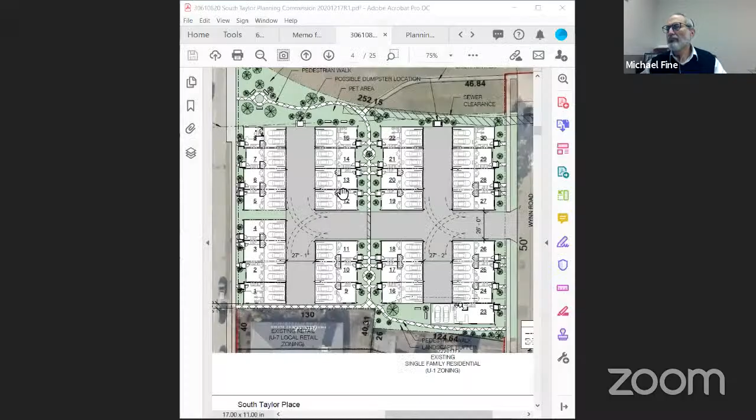And let us know if you want us to ask questions as you go along, or if we should hold those to the end. I'm comfortable with whatever works for the group — if you want to just jump in and ask as we go, that might be easiest. I just want to make sure with the mayor what he would want to do. Well, Hanna, if you're presenting, I'd leave the preference to you if you're happy to address questions as they come up, and feel free to point out if it's something you'll be getting to. Okay, that sounds good.

All right, so our project, we're calling it South Taylor Place.

It's a 1.2 acre site. You can see the site location here—it's a little zoomed out, but it sits between Taylor Road and Wynn Road, in the northwest corner of the city, just on the Cleveland Heights border.

These are some site context photos. You can see photos from South Taylor, Wynn, and Washington. Our site is bordering the education center to the north, residential area to the south and southeast, and then the commercial district on Taylor to the south and west sides of the property.

And remind me, does the laundromat go down or does that stay? That stays—that's off of our parcel.

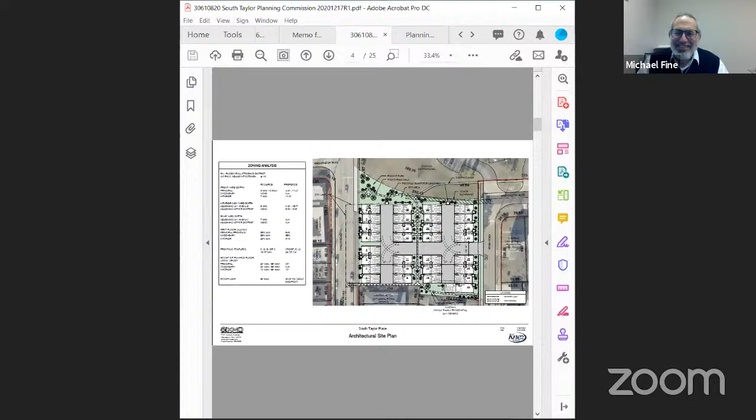Is this the Kenny Kings, or the Kentucky Fried Chicken site? No, we're north of that—there's just no buildings on the site. Got it, sorry, I'm one street over. I've done this my entire life with Cedar and Taylor. Yeah, just south of the Delisle Center. Shame on me. That's all right.

So this is our proposed site plan. We're proposing a 30-unit townhouse development. We think townhouses are a great fit for this site because it sits in between the residential neighborhood and the commercial district on Taylor, serving as a bridge with a mix of higher density residential that creates a nice transition into the commercial district. The zoning on the site is the residential attached district.

Residential attached units are a permitted use in the zoning district. Our units will be fee simple, so they're not condos—they'll be owner owned. They own the building and the land underneath their building. There will also be an HOA that handles maintenance and maintains all of the common area around the buildings.

We believe our site plan complies with the district requirements in terms of compatibility, site layout, building features, circulation, and parking. For compatibility, I'll turn it over to our architects in a few minutes to go into the details of the buildings. I'm just going to take you through the site plan to start off.

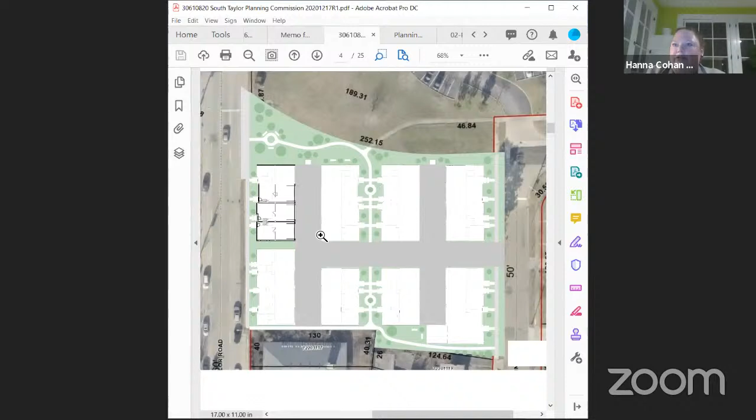I'm going to zoom in a bit for you. Our site layout is meant to address both of the streets that our property is on. So we have units 1 through 8 fronting on Taylor Road, and units 23 through 30 that front on Wynn Road.

We also created a central public courtyard in the center of the site—two groups of units face each other in the middle with a shared green space and pedestrian walkway between them. We also have two park areas that would be open to the public as well as residents, one in the northwest corner and one in the southeast corner.

We're proposing a single—well, you have the site plan up, on Taylor Road, can you explain the strip on the front? What's going on there?

I just want to know if it's compatible with the rendering that shows an actual tree lawn. Yes, sorry, that's kind of just the graphic. We will continue the existing sidewalk where it is, and up until Unit 8 there is an existing tree lawn that would be maintained.

So there will be a tree lawn, unlike what was done on Cedar Road. That's our intention. I think what we did at Cedar Road is unfortunate—it's all concrete with no separation, no barrier, no psychological or green barrier between the street and the sidewalk. I can't tell from this drawing, it doesn't show a tree lawn.

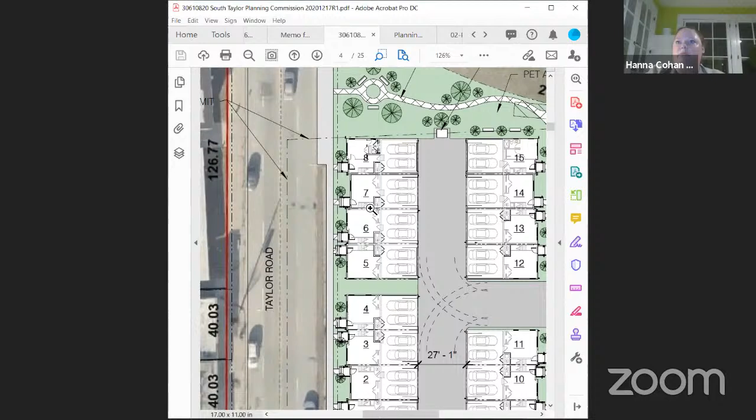This dashed line here is actually the city border. So our buildings are all staying on the University Heights side of the property, but this corner of the property is in Cleveland Heights, so we'll be coordinating with them on the park design as well.

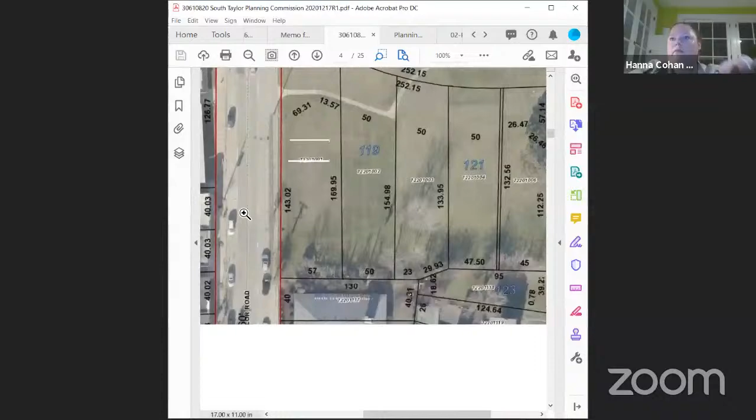We focused a lot on this design on the pedestrian experience of the site and the pedestrian circulation. We have access from all sides of the property. There's an existing public pedestrian walk on the property that we border to the north at the education center, so our intent is to link up to that path and extend it out to Taylor.

That's part of our pocket park design there. We're also trying to do some interesting features with the landscaping in the center courtyard, and then we have our second pocket park down here in the southeast corner.

Quick question, what makes the pet area a pet area? It doesn't visually look any different from other park area in the drawing. We're proposing some benches there. It's really open space, we just want to propose different potential uses for the residents so there are options for them, but it would really just be some open grass area with benches that you could sit and take your pet.

So no proposed fencing or anything like that? We don't have any fencing proposed right now. We do have a landscape plan later in our presentation, and particularly at the southeast corner of our site, we are bordering one single family residence, so we are proposing a pretty heavy landscape screen there. If there was a desire for fencing, that's something we're open to. We're not currently proposing it because we don't want the site to feel walled off or closed off and the pedestrian paths totally private, but we are open to fencing if you think that's desirable.

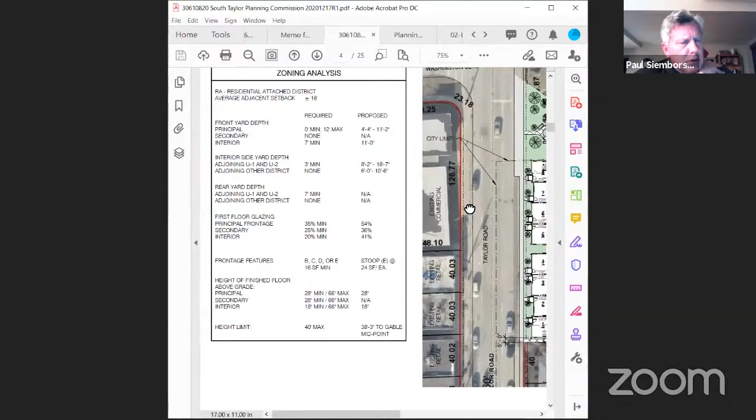Sorry, let me just—I'm sorry, go back? Can you go back to your rendering? Yes, we have elevations and renderings to go through. No, no, I know, I just want to go back to the rendering for a second.

This one—so, yeah, the space between the units there looks like a full unit, right, in the rendering.

It should be correct per the site plan. Christina or Garrett, I don't know if you could address that. I'm just saying, when I look at that rendering, it looks like that gap is the width of a whole unit, a whole townhouse, unless I'm reading it wrong. I don't know if that's maybe just the angle.

We can go through some other renderings we have. No, I saw all those. I just want—pictures are worth 1,000 words—and I want things to be super clear, if I'm wrong, great.

That shows a tree lawn, and so we're going to expect a tree lawn there? Okay, so what's the point of the tree lawn then if you can't walk on it? Why not just make the units bigger at that point?

Are you talking about the tree lawn between the sidewalk and the street? No, I'm talking about between units 4 and 5, where you have an opening, which I thought would have been a place where guests who park on Taylor can walk through the site, but that's not going to be the case. Then what's the point of that grassy area?

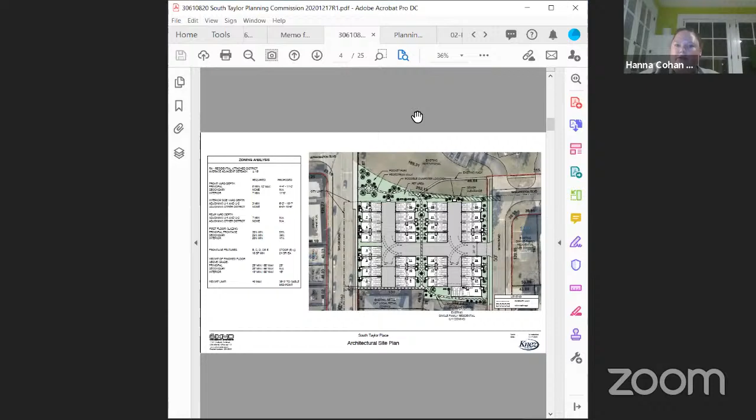Okay, I'm going to just go through the rest of our slides and then we can circle back to this if there's more questions. This is a preliminary layout of what the plat would be for this. The units are divided up fee simple, and then there's a common area that encompasses the rest of the land, which is maintained by the HOA.

I'm going to turn it over to our architects, Christina and Garrett, to take you through the architecture and the design of the buildings themselves, the materials and the landscaping. If you guys just want to let me know when you want me to go to the next slide.

So this is our elevation along South Taylor Road. What we were trying to do is keep the traditional forms that match the context of the city, but seeing as though they are townhouses, they are a more modern kind of project. They do have a modern feel to them as well, with oversized windows, open floor plans, just simplicity, but still have that traditional context. The front elevations on Taylor have brick and siding, a covered front stoop, and some added detail in the pediments with brackets.

So you can go ahead, Hanna.

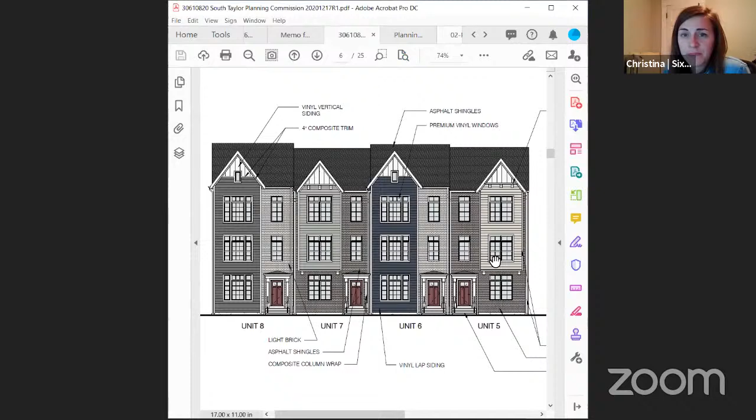I just have a comment here, and I guess I'm a little disappointed in that when Knez came to us, the city council, probably 2 years ago now, we were promised that these would be views of downtown from the roof deck. And these are pitched roofs along the street edge. They're beautiful, don't get me wrong, it makes a beautiful townhouse look, and anywhere that would be terrific. But I've been touting this as townhomes with downtown views, and the roof decks face the parking lot, or the driveways. So what's the thought as to why we had to pitch the roof and put the roof deck behind?

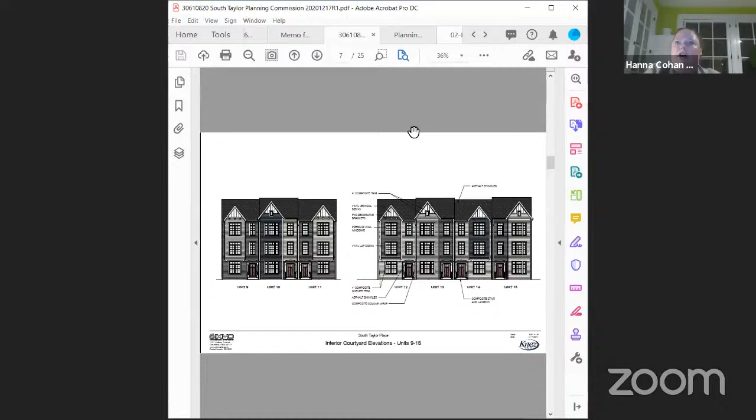So there were a couple reasons we went for this aesthetic. The main one was that the pitched roofs fit into the context of University Heights well, in our opinion. The roof decks do end up facing both ways because the units are flipped two directions, so they're oriented towards the drive, but they're two different directions on the buildings overall. The basic thought is that it would be an option, so it helps us control the price point for our clients as well.

So you could buy a unit that just has a pitched roof, looks lovely from the front, or you can choose to buy it with the roof deck. It'll be up to the customer if they're going to have that roof deck or not. We like the pitched roof for that because it allows the building to look the same from the front and on the street side, no matter what the clients pick. Then sort of hidden in the roof line in the back is that roof deck, so it allows a seamless appearance in the front of the buildings, and gives the customers a little bit more customization.

I guess I was just really excited when they sold the project years back that having the roof deck with the views, I was almost envisioning that they would be flipped. The roof deck would be facing the street, and it would be great. You'd be up there with your cocktail and have this urban experience, watching people walk by and watching the sunset, and that's not the case now. So now I'm going to be facing the people across the driveway on their roof decks. It's not what I was expecting this to be when this was revealed to us a couple years ago.

And John, if you guys are told that, we shouldn't just roll over, I think this could be better. And I'd sure as heck rather be looking at the city than looking at a driveway with 1,000 cars in it.

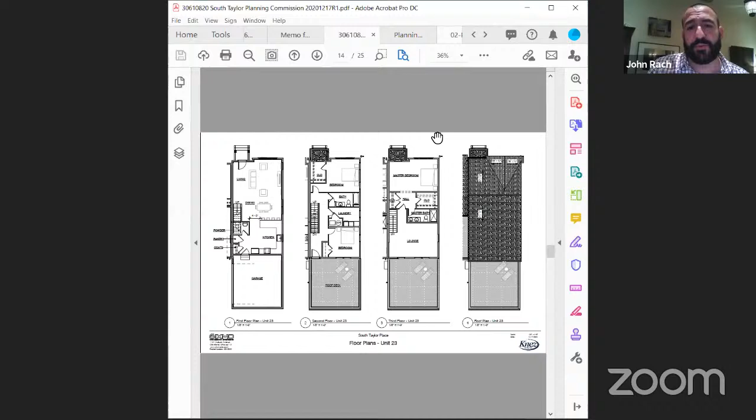I wish I had that rendering, I don't remember what you provided. I think it was just a site plan, but it was the idea of this being a place that engages the corner. These are beautiful renderings, and this will be a great place somewhere. For this site, I was really excited about the engagement with and views of downtown, which we don't have here. Maybe you can see it through these third floor windows. This is a 3-story building across the street, but lop off those gables, put a roof deck on top, and you've got yourself a view.

Yeah, I will say, that is what came up in the preliminary discussions, and it's something I still find interesting and compelling. There is a way to still do that. This does have a great look, but it did come up, even before our pre-administrative review, as to whether you would have those views from the decks. I'm not sure if we would, and I think that's worth further examination if that's important. I wasn't sure if that was something I clung onto and nobody else did, but hearing you say it now, it wasn't just me. Maybe this is something we should take a closer look at.

And it could happen at end units, so maybe there's relief where there's that slot between 4 and 5 - not every unit, but this one and that one. But you could do more, and if this was talked about, you should explore it. I apologize if there was communication about this; I don't believe I was involved in those meetings, so I can circle back with some other people in our office to get a better understanding of what was discussed.

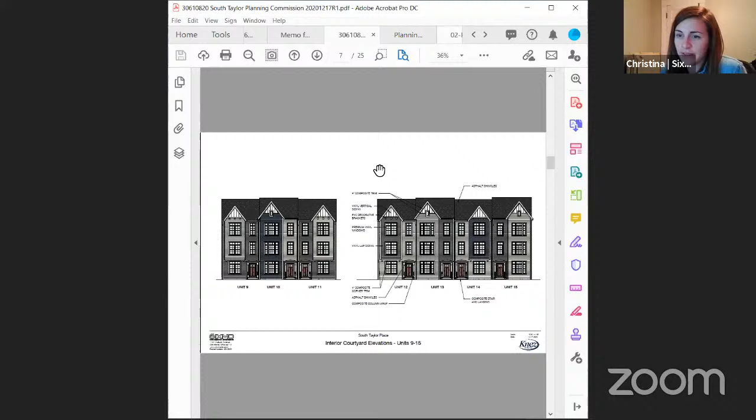So the interior courtyard elevations, these are all sided buildings, but with the same look as the South Taylor Road buildings. Vinyl or Hardie board or what? We were looking at vinyl. And this will have thin brick too, right? This isn't even real, it's thin brick? Yep. Okay.

I'm not here to comment on architecture, but I think those end elevations could be, you know, should be a canvas for you guys. If you want to raise more money, do great design. You want to sell these things for more. Anyway, I'm just trying to raise the bar on the end elevations. Use the opportunity.

Just a quick question about the windows. The drawing shows the windows with the grids, and the drawing will be accurate, right? You're doing kind of the historic leaning windows with grids. Yep. And they're casement style windows.

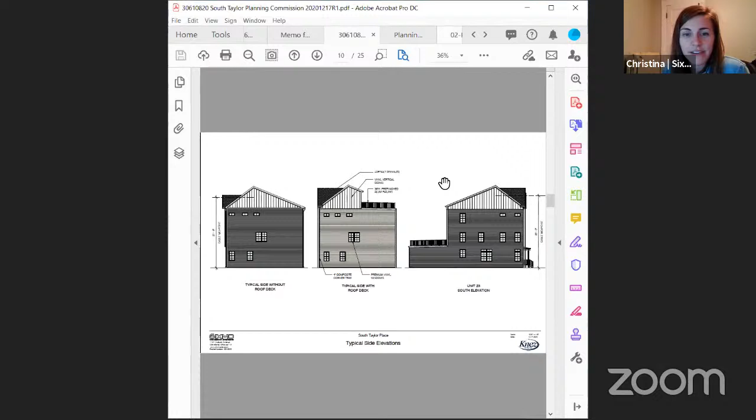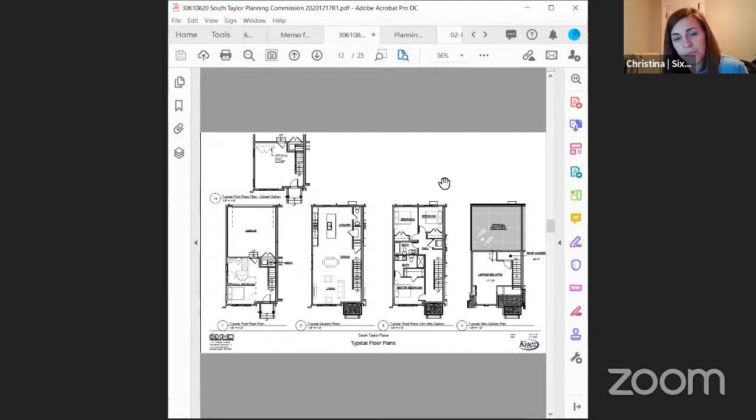So, typical floor plans. You can see there's some options here for the first floor. Second floor is your main living space, all open concept, and your third floor is your bedroom. Then there's an attic option where it's basically just a stair to go up to a little corridor to get to the roof deck.

And then just showing some third floor. Next slide. Unit 23 is just a unique unit, so we have a separate plan - we're showing the main living space on the first floor in this unit, bedrooms on the second and third floor, and the roof deck is on the second floor.

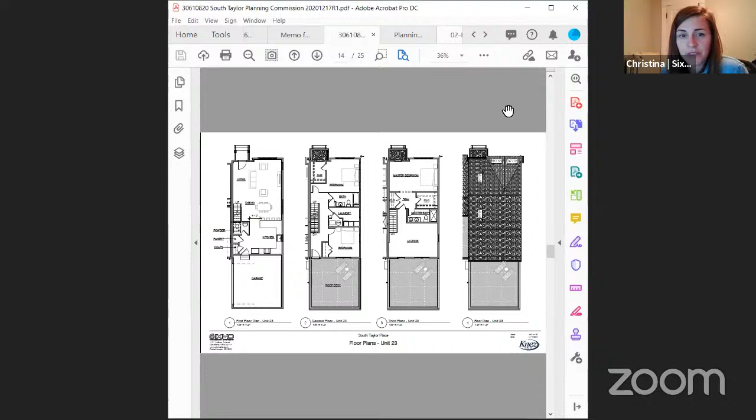And these are the materials: asphalt shingles, very typical residential style materials, vertical vinyl siding, lap siding, thin brick. Everything is, the idea is to have them be low maintenance for these homeowners, so they don't have to worry about painting them or any strenuous upkeep.

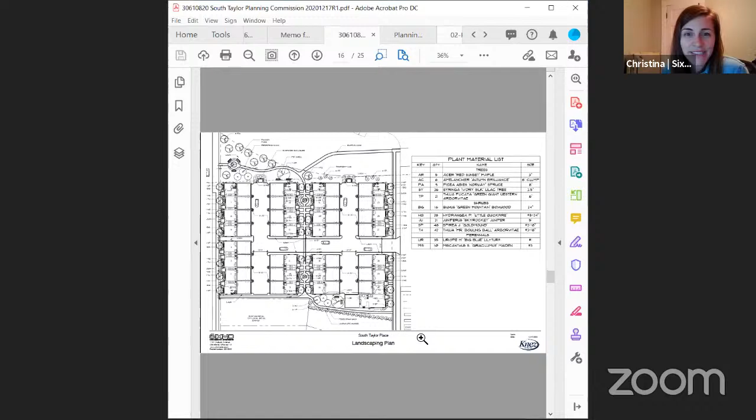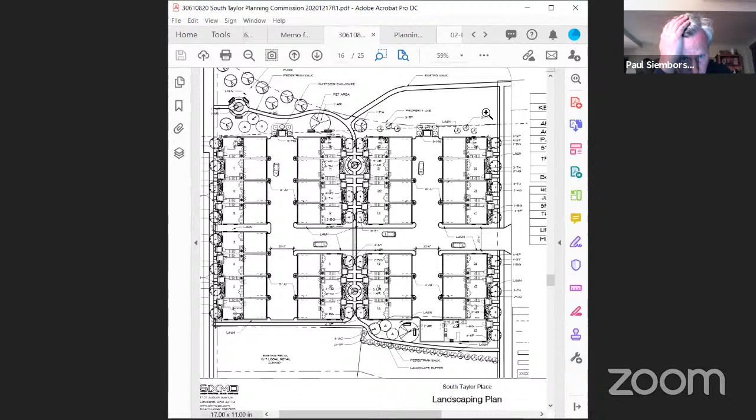Landscape plan - can't really speak too much to landscaping, it's not my area, but you can see that buffer down to the south property line. I know those are arborvitaes. It looks like there's more greenery wrapping the buildings than the other site plan you showed. Yeah, this one is an older version of the site plan. We made some tweaks, and one of the major tweaks was the fire department asked for a wider drive lane, so we lost some green space to get that wider drive lane.

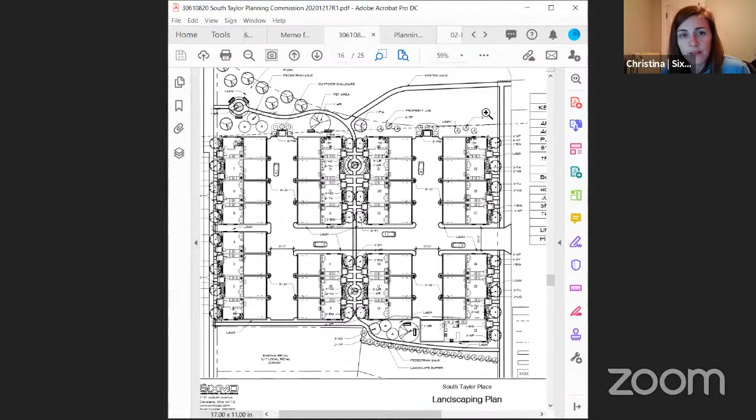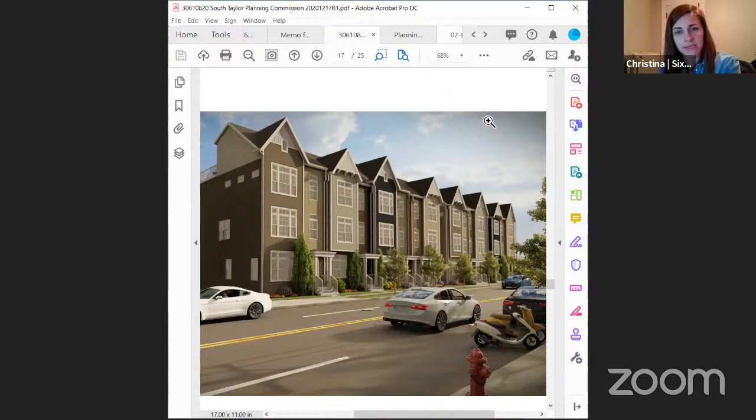And these are the renderings. This rendering shows it a little bit better. I wonder if that rendering on the front cover might have been outdated. This one shows that spacing between the two buildings a little more accurately. Well, just get them consistent. Right.

So you're saying here's that space, that 8 feet between that building? Mhm. And you're going to have windows in there? We typically, when the sidewalls are up against each other like that, will do more transom windows, so it lets the light in but it's private, or we'll stagger the windows so you're not looking into your neighbor's unit.

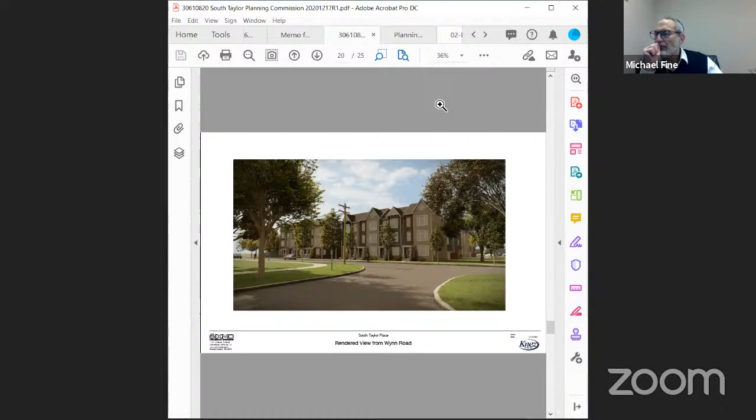This is Wynn Road from this angle. And this is the interior courtyard.

Christina, what's the material around, let's call it, the entry - the porch? Yeah, so they're going to be composite wrapped columns, vinyl railing, composite decking on the step and the little porch stoop. It'll be aluminum railing and AZEK trim with the composite decking.

You know, the beautiful steps here in Cleveland and University Heights are this beautiful one piece of stone. I know we can't afford that anymore. And it's usually this very thin, beautiful black iron railing. I'm just asking you to look at our city and those details. I'm not wearing the architect's hat here, that's others' business, but there's something beautiful about that stuff versus deck and aluminum.

Why the decision to make the special unit have the deck on the lower level versus that higher level that might potentially have that nice view? It keeps it closer to the main living space. And really, we only have that bump out extending that building to give some more privacy to that residential neighbor. We don't want to build that unit up three stories at that size because it just ends up being too much square footage and it's not really saleable at that point. So it just gives a little bit of variety, and again it only occurs in that one unit. That unit will have the roof deck no matter what - that's not an option, it will come with that deck.

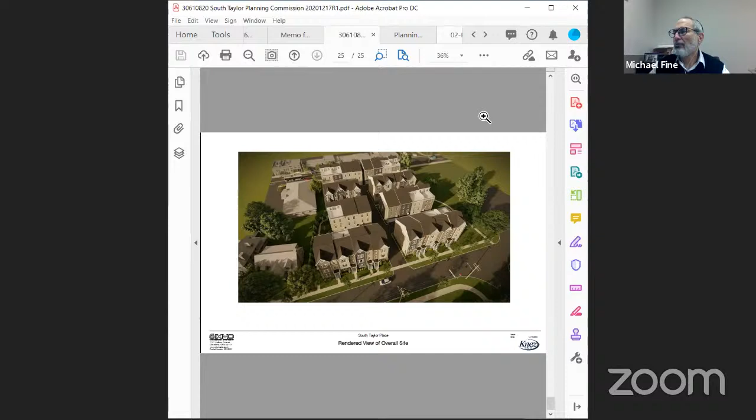Just ask you to look at quality over quantity. In the long run, good materials hold up well, and quality lasts. Materials matter in this tough climate we live in.

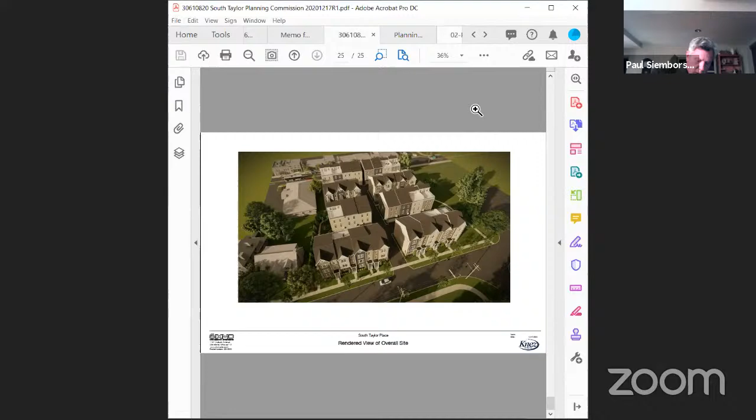If I could just throw one quick thing in there too. One thing I noticed is that the front cover image is actually the image of Wynn, not South Taylor. That's why there's such a large gap between the buildings there, because what you can't see is the drive on the ground actually. So that's the drive cutting between the two buildings from Wynn, which is why there's so much space in between the two buildings. I just thought I'd throw that out there. That's an updated image, not from South Taylor. That's from Wynn, and that would be the Pocket Park entry, kind of on the left-hand side there, to go into the smaller of the two Pocket Parks. So there's a driveway there between those on the cover. That's why when you look at the South Taylors, what you're actually looking at here is the Wynn entrance of the project. Okay, maybe best to label that cover.

Appreciate that clarification. Are there any other questions that we can help to clarify?

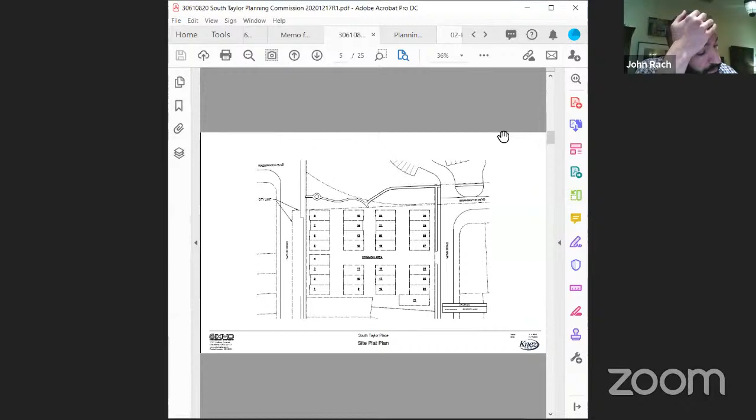I didn't know what you were looking for this evening. If you go back to the site plan, unit number 30 - okay, so the property line looks like it starts at like unit 8 at that corner, and it looks like it's a diagonal. Is that correct? This is the city line, not the property line. That's the city boundary of University Heights. Property line is this arc up here.

Okay, so we actually could move these units up a little more if we need to. We started with the units up over the city border, and that was one of the requests in our preliminary meetings, was for us to move all the units south and steer clear of that city boundary. So we already made that opposite adjustment. And what was the rationale for that? I think part of the rationale, John, was that was going to give University Heights quite a bit of say and input into aspects of the site plan that they otherwise really don't have any business commenting on.

Because what I'm suggesting here is that perhaps we could, if that gives us a little more wiggle room, that could address some of the issues such as sidewalk on that center drive.

Does the dumpster have to be right there? This is a tough one with the dumpster, because it's hard to get to if you're in unit 16. You're going to walk quite a bit, and then if you're backing out of 22, like Mr. Szymborski said, could we provide a little more bump out on that driveway there to make it easier to back out, since we have more land?

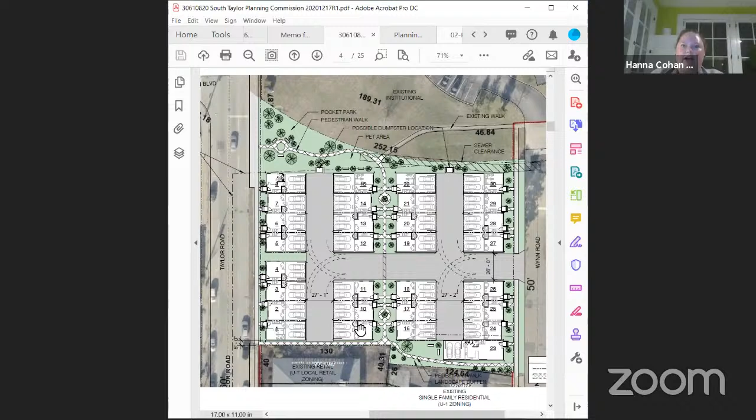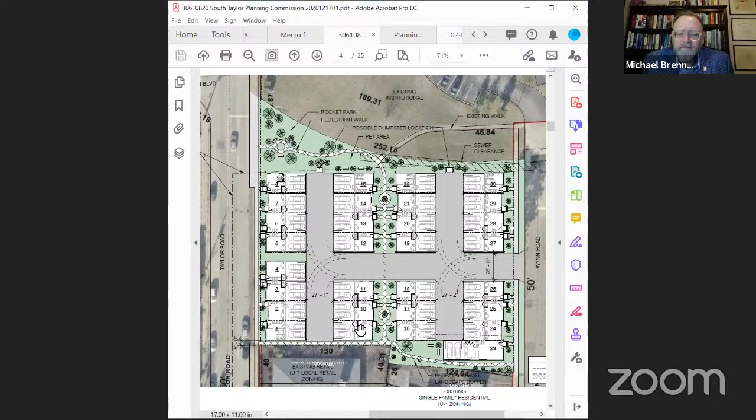Is everyone still there? Hannah, I don't know if you can hear us, but you're frozen. Yeah, Hannah, you're frozen, we can't hear you. All we heard was 'one thing we could look at' and then you dropped out.

Mayor, is there an approval, or what are we looking for tonight? I'm running out of time. I'll be quick - we were looking for site plan approval tonight. Oh, this is Luke McConville again.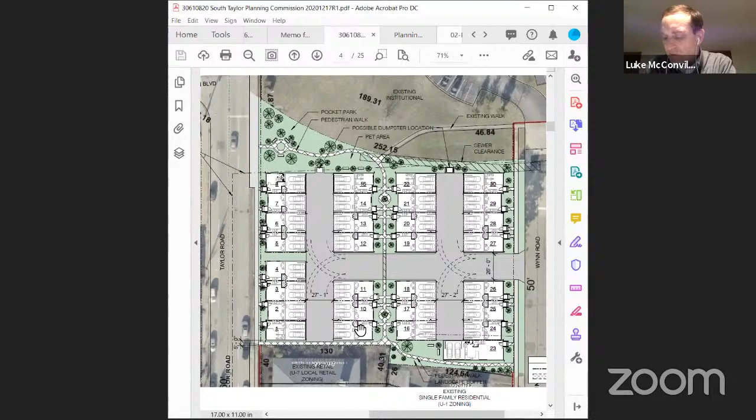While folks have been talking, there was one thing I remembered from the history of the project that I want to fill in. The other reason we were suggesting all the units be kept in University Heights was that the city, about 2 years ago, created a community reinvestment area covering the entire landmass of the city. As a result of that CRA, we're able to offer real estate tax abatement on new construction, and that goes into the marketing of the properties.

I just don't know whether Cleveland Heights would be able to create a CRA, or what their tax abatement situation is, but it certainly makes that piece of the project more complicated and potentially more difficult to market and sell. So I think that was another factor in suggesting it be developed that way.

The other thing I'd put out there, for Michael and David's response and thoughts: a couple weeks ago a group of us were on a Zoom conference to review the site plan. We hadn't seen elevations yet, but we talked about the site plan, the administration's thoughts, walking through process issues, and encouraging you to do exactly what you've done, which is meet with our engineer and our fire and police departments, or at least provide them materials for review.